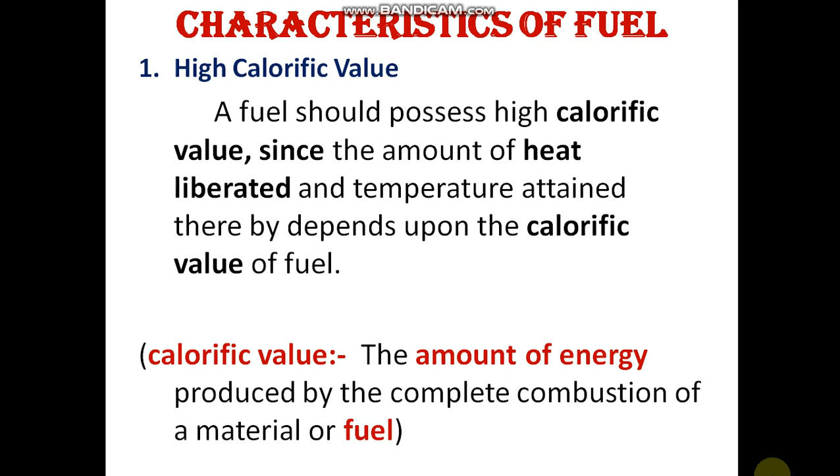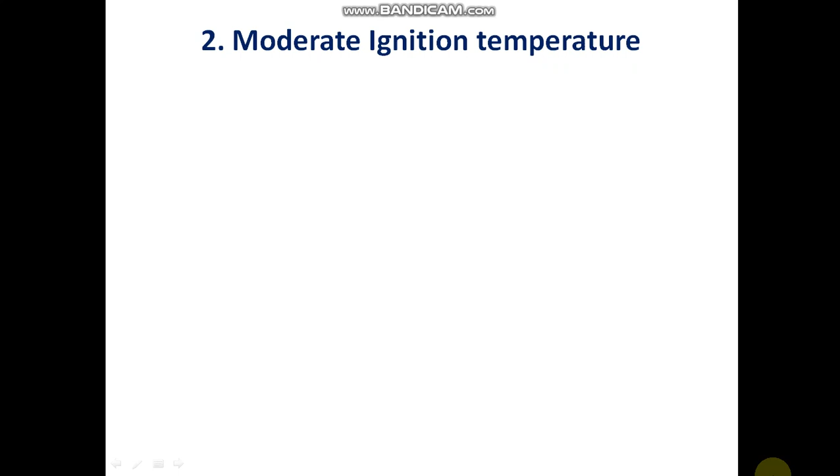Second, moderate ignition temperature, meaning the fuel should neither have low ignition temperature nor high ignition temperature. A low temperature should not be required for it to ignite and burn, and it should not require too high a temperature either. It should be flexible, it should have a moderate temperature at which it burns easily.

If it is low, what will happen? Low ignition temperature is dangerous for storage and transport of the fuel. If I store the fuel and it attains a low temperature, it will be exposed, it will burn out or explode. Even for transportation, it will be dangerous.

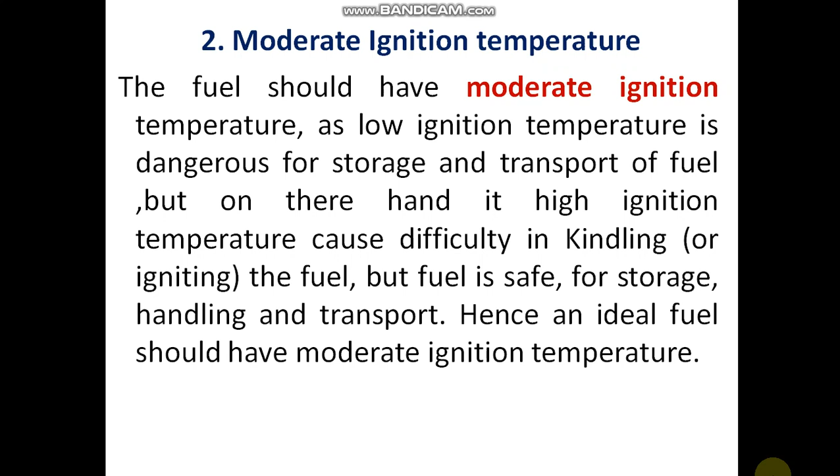Third is low moisture content. What does low moisture mean? Whatever fuel we are taking, it should have very low moisture. For example, if I take wood to burn, it should be totally dry. If it is dry, then it burns easily.

But if there is moisture in it, what will happen? The fuel will reduce the heating value, meaning it will not burn properly. So the moisture content of the fuel, if present, will reduce the heating value of the fuel, due to which there is a loss of money.

Loss of money क्यों बोलते हैं हम लोग? Because it is paid for the same rate as the fuel.

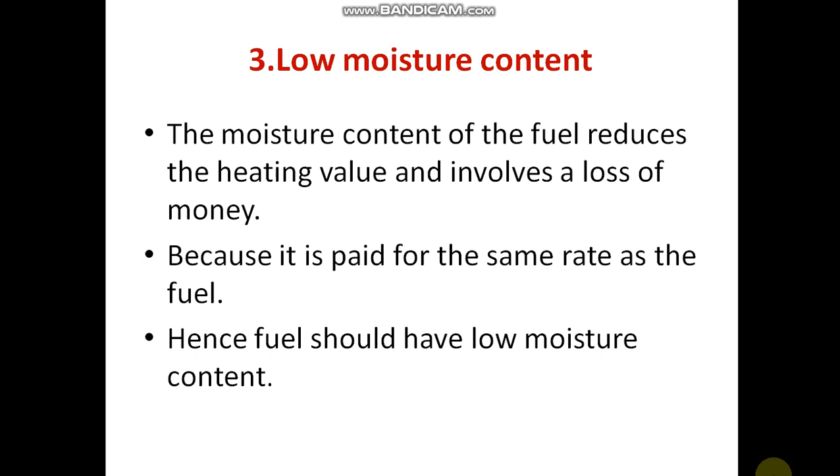It is paid for the same rate as the fuel. Hence, the fuel should have low moisture content. Low non-combustible matter means what? After combustion, जब fuel burn होता है, what will happen? The non-combustible matter remains generally in the form of ash or clinker.

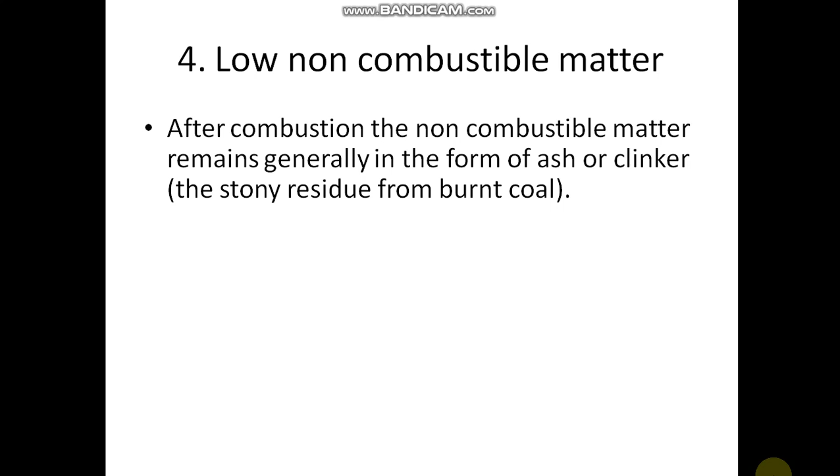Besides, whatever the clinker or ash is there, there is the additional cost of storage, handling and disposal of the waste product produced. To dispose it, I need the labor. To handle it, I need the labor. To store it, for that also the labor is needed. Means what? Whatever non-combustible matter is produced after combustion, it should be very low.

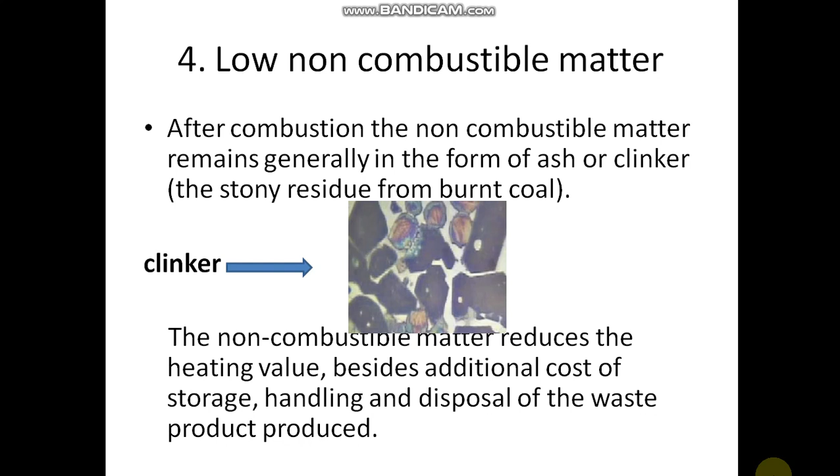It should not be very high because it may create the problem for storing, handling and disposing, because for these things we need the labor, we have to pay them, and even if I store it, it is useless. Even if I dispose it, the lands are being filled and that land cannot be used for other things. So the fuel should have low non-combustible matter.

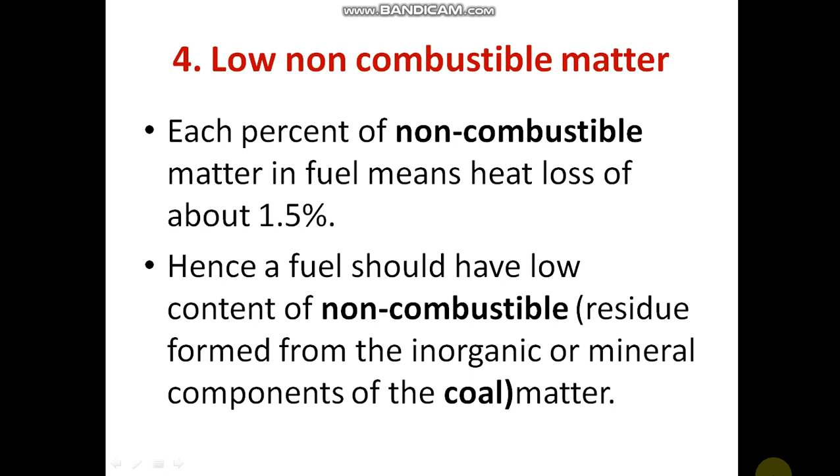Each percent of non-combustible matter in the fuel means heat loss of about 1.5%. The loss of heat is 1.5%. Hence, a fuel should have low content of non-combustible matter. Then, moderate velocity of combustion. Moderate means the velocity, or what we say the flame, should be moderate.

If the rate of combustion is low, then the required temperature may not be possible because part of the heat liberated may get radiated instead of raising the temperature. Means what? The rate of combustion is low as per the required temperature. Because of that, the heat which is liberated may get radiated instead of raising the temperature.

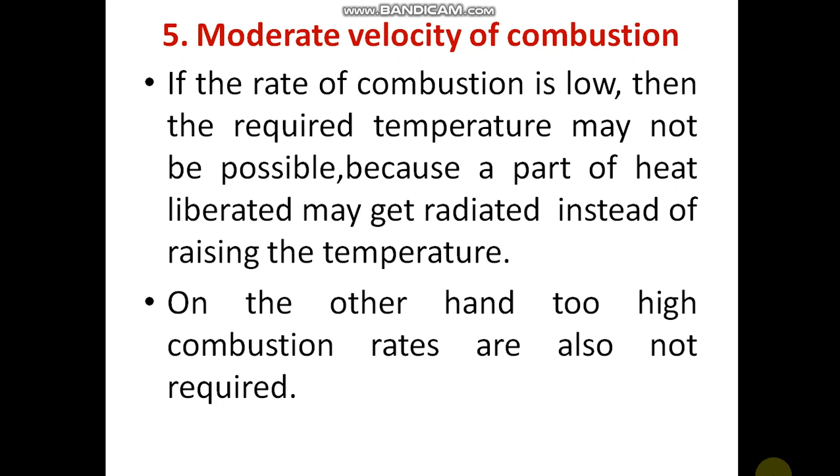Means it is a loss. On the other hand, if I have too high a combustion rate, then also the heat is lost. So what I want to say is it should have a moderate velocity of combustion. The speed should be medium, moderate. Then, the products of combustion should not be harmful. Whatever product we are obtaining should not be objectionable, nor should it be harmful gases.

The fuel on burning should not give objectionable and harmful gases. In other words, the gaseous products of combustion should not pollute the atmosphere. Now you can see the gaseous products like CO, SO2, H2S, PH3, etc., like phosphine, sulfur dioxide, carbon monoxide. These are the harmful gases. So the products of combustion should not be harmful.

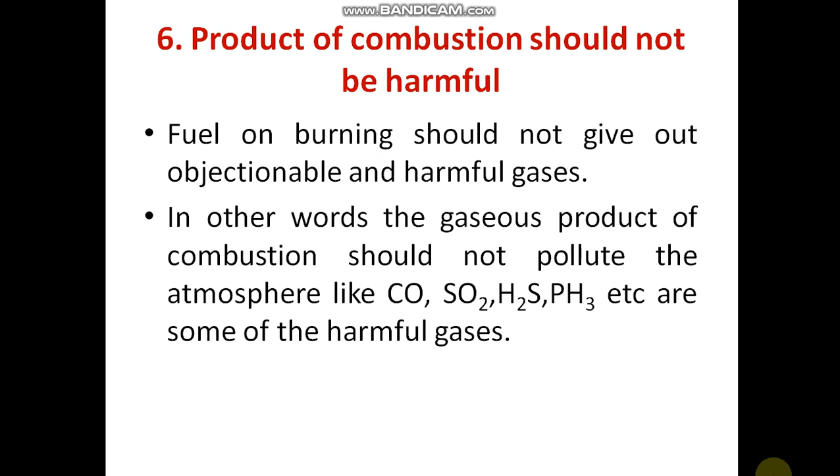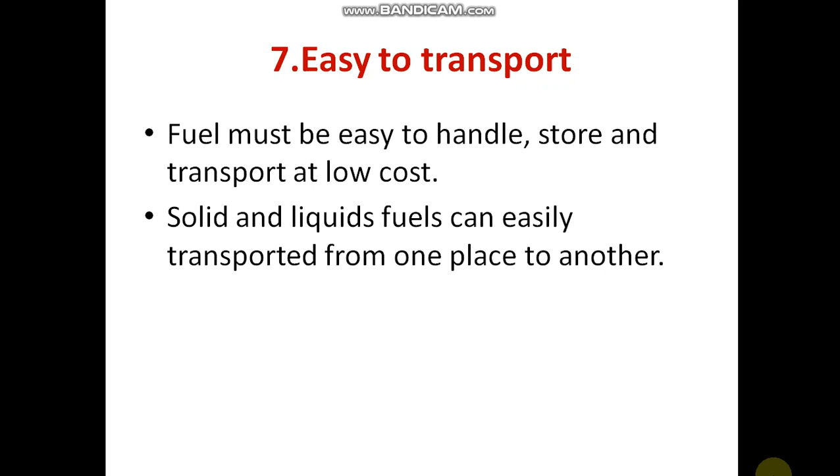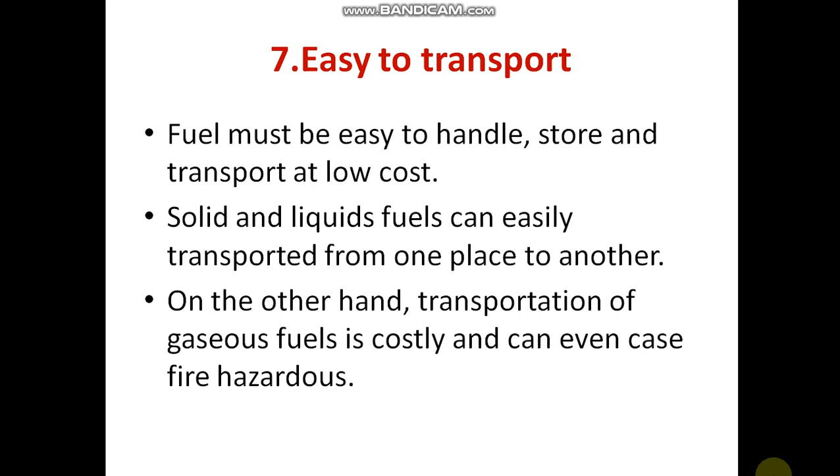Seventh is easy to transport. The fuel must be easy to handle, store and transport at low cost. Solid and liquid fuels can easily be transported from one place to another. On the other hand, transportation of gaseous fuel is costly and can even cause fire hazards.

Combustion should be easily controllable. This is one of the points. Combustion of the fuel should be easy to start or stop when it is required. Low cost: a good fuel should be readily available in bulk at a cheap rate.

So when we take a fuel, it should be of low cost, and the fuel should burn in air efficiently without much smoke. The storage cost in bulk should be low. So when I'm storing it, the cost should be low. Last, in solid fuel, like coal, the size should be uniform, so the combustion is regular.

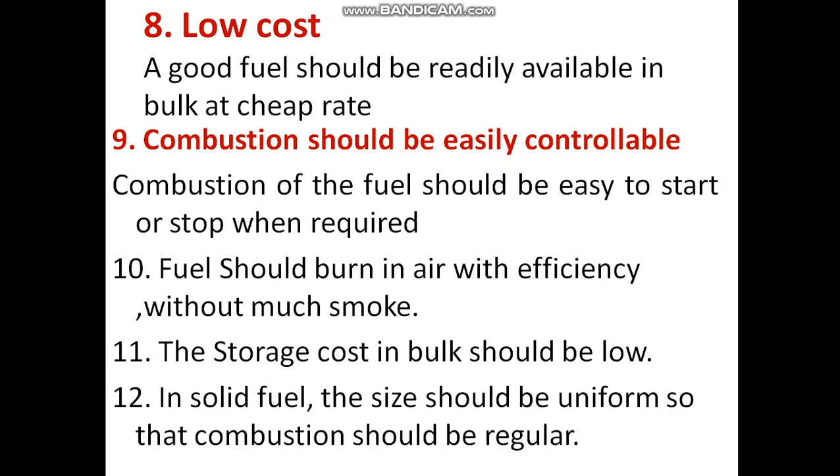So this was all about the characteristics of the fuel. Hope you have understood it.